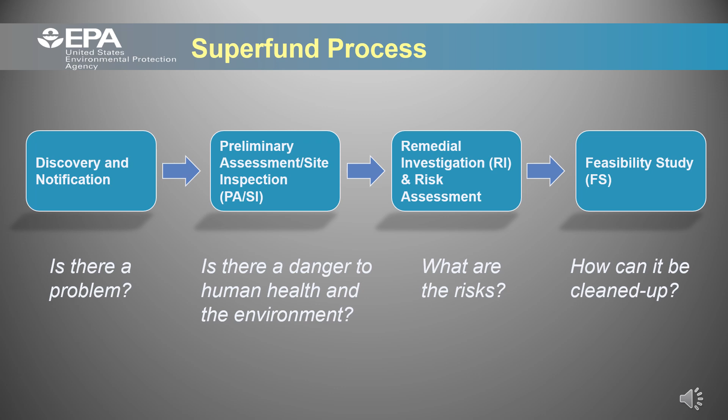Then potential cleanup alternatives are analyzed in the feasibility study, or FS. After the cleanup alternatives are developed, the option considered best for the site is proposed to the community for evaluation and comment in a proposed plan. Now, we've been at this stage before for this particular site. Back in 1993, a pump and treatment remedy was selected. Unfortunately, it was not effective and other cleanup alternatives were evaluated.

A responsiveness summary of the public comments and the responses to those comments will be created once the comment period ends. Public comments can change the course of action for the site, so it's important to submit any comments you may have. The cleanup method that is ultimately selected for the site, along with the reasons for its selection, are set forth in the record of decision that will be created after the public comments have been addressed.

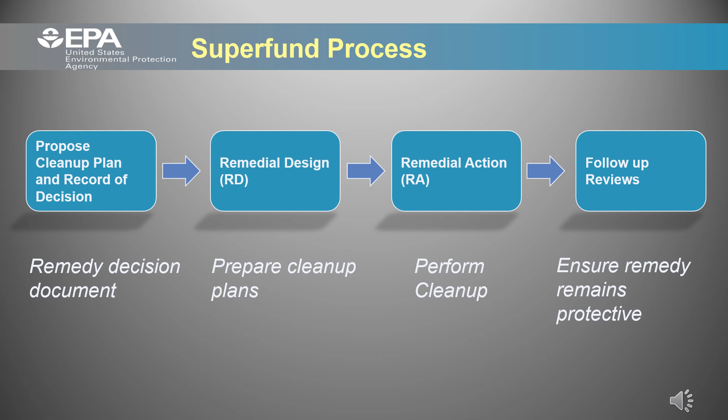From there, the remedy will be designed and implemented during the remedial design, or RD, and remedial action, or RA, respectively. Upon completion of the remedial action, long-term monitoring or 5-year reviews will continue until unlimited use and unrestricted exposure is achieved. Now, a little about the site background.

Operations began in the mid-1950s and the site was used by several companies for the storage and formulation of pesticides. Thomson Hayward Chemical Company, later renamed TH Agriculture and Nutrition, or THAN, purchased the property from Planters Chemical Company in 1967. Dry formulations, which combine technical materials in a proportion specified for a particular product, were mostly done in the 1960s and 70s. The liquid formulating area was used from approximately 1973 until approximately 1978. Very little, if any, pesticide formulating occurred at the THAN parcel after 1978.

THAN sold the western 7 acres, known as OU1, to VanCleave Builders in 2015. OU1 includes soil contamination on the western parcel, where THAN operated, as well as site-wide groundwater. The eastern 5 acres, or OU2, is owned by the Jones family properties. OU2 includes soil contamination on the eastern parcel, or Jones parcel.

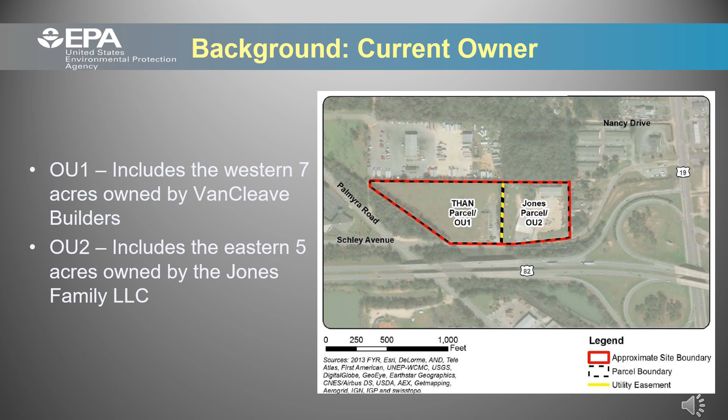The soil and subsurface contamination is believed to have resulted from cleaning activities. Typically, trucks were swept out on the eastern portion of the site and the yard adjacent to the large warehouse. The blending tank in the liquid formulation area was rinsed between batches of different products with xylene and was then discharged to a drainage ditch which ran east to west across the THAN parcel, behind the liquid formulation buildings, to the low-lying area in the southwestern portion of the property.

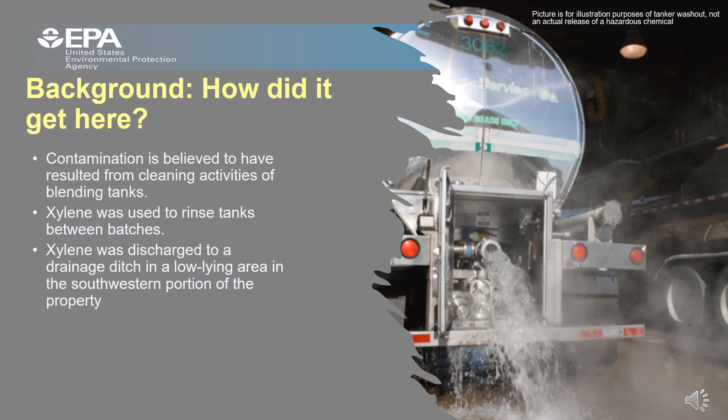Okay, let's continue with the site history. Business operations ceased at the site in 1982, and THAN conducted two removal actions to address contaminated surface soil. One in 1984 with Georgia Environmental Protection Division oversight, and the second in 1992 with EPA oversight. Activities included demolition of buildings and structures, installation of a perimeter fence, excavation of contaminated surface and shallow soil for off-site disposal, and establishment of a vegetative cover.

Based on contamination discovered during the first removal action and subsequent investigations, the EPA placed the site on the Superfund Program's National Priorities List, or NPL, in March 1989. In 1992, EPA performed oversight of excavation from the top foot of soil on approximately 6 of the 7 acres on the western parcel, with specific areas excavated to 7 feet below ground surface. In total, approximately 20,000 tons of soil was removed during the second removal action.

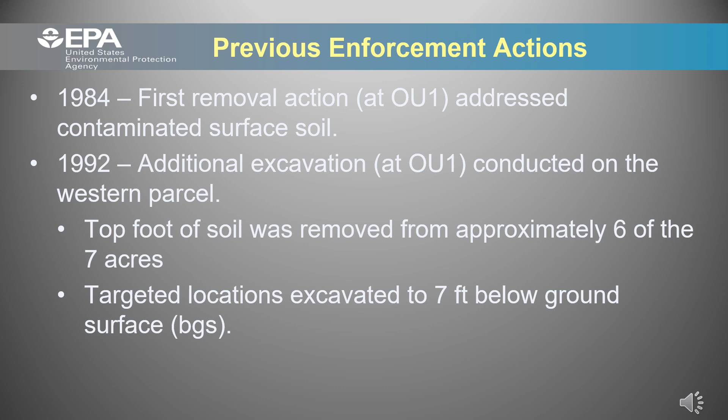The EPA issued the OU1 Record of Decision, or ROD, in May 1993, which included the THAN parcel and site-wide groundwater. The 1993 ROD selected pump and treat as the remedy, with quarterly monitoring and maintenance and institutional controls restricting land and groundwater use. The 1995 Explanation of Significant Differences, or ESD, expanded groundwater pumping, determined UV oxidation was not needed since the granulated activated carbon was sufficient, and added 3 dual-phase vacuum extraction wells to extract groundwater and soil gas. The 1995 ESD did not change the institutional controls or groundwater monitoring requirement.

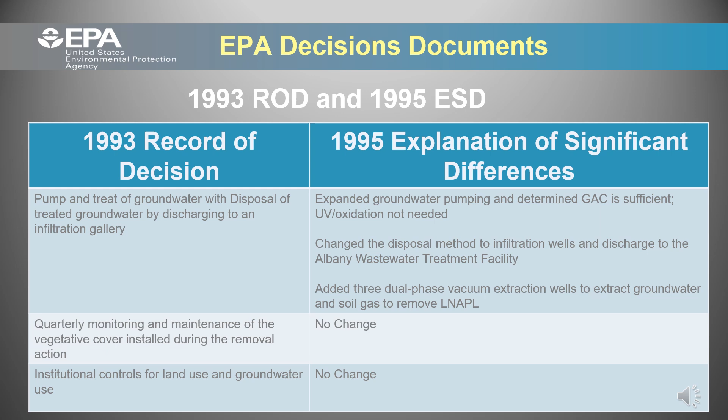A pump and treat dual-phase vacuum extraction system operated at the site between 1996 and 2002. No LNAPL was observed in the extraction system LNAPL separator during the first 2 years of operations. Therefore, EPA determined that LNAPL removal was considered ineffective, and the LNAPL separator was bypassed in November 1998. From 1996 to 2002, approximately 3.5 million gallons of water was removed, containing an estimated 480 pounds of LNAPL and 7 pounds of pesticides. In 2003, operation of the groundwater treatment system ceased due to the low contaminant of concern recovery rate. THAN continued to monitor groundwater contamination trends and plume migration to evaluate other options for the treatment of site groundwater.

In 2013, the EPA evaluated groundwater contaminant trends and plume migration and determined that the groundwater plumes were not migrating laterally. However, concentrations of some contaminants were increasing in deeper wells, likely as a result of vertical migration from the shallow aquifer zone.

The LNAPL plume, or xylene, is located in the central portion of the site. The LNAPL is considered a principal threat waste. It acts as a carrier for pesticides. Therefore, this liquid contains toxic compounds and is a source of groundwater contamination. The dashed blue line represents where xylene concentrations are detected above 10,000 micrograms per liter. Monitoring well MW-N2 regularly contains measurable LNAPL. In October 2022, it was measured at a thickness of approximately 2.5 feet.

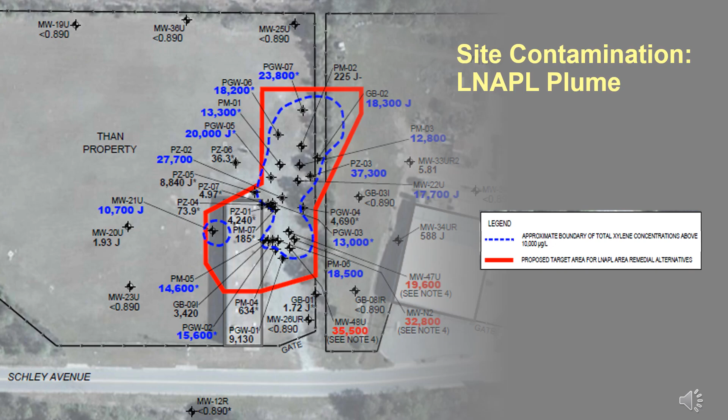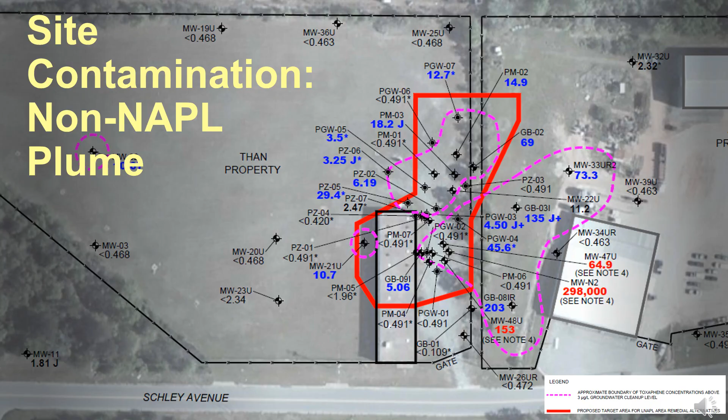This slide is going to touch on the chemicals of concern and cleanup levels, which are based on either Safe Drinking Water Act maximum contaminant levels, referred to as MCLs, or human health risk-based values. Let me try to provide some context on these values.

MCLs are laws that help ensure our drinking water is safe to consume. Each chemical-specific value is based on scientific research and health considerations. Human health risk-based numbers are important tools for assessing the potential risk associated with exposure to various substances. These numbers are based on scientific data and are designed to ensure that people are not exposed to harmful levels of toxic substances in their daily lives or work environments.

The units of measurement for the proposed cleanup goal are micrograms per liter. This measurement expresses the concentration of a substance in a liquid or solution. Specifically, it refers to the number of micrograms of a substance, in this case, a contaminant, which is present in 1 liter of liquid. This is a very small number.

Take, for instance, a dime, a raisin, or one plain M&M, and imagine holding it in your hand. Each one of these weighs about 1 gram. If you were to cut an M&M into 1 million pieces and dissolve one of those pieces into 1 liter of water, you would have 1 microgram per liter of M&Ms present in that water sample.

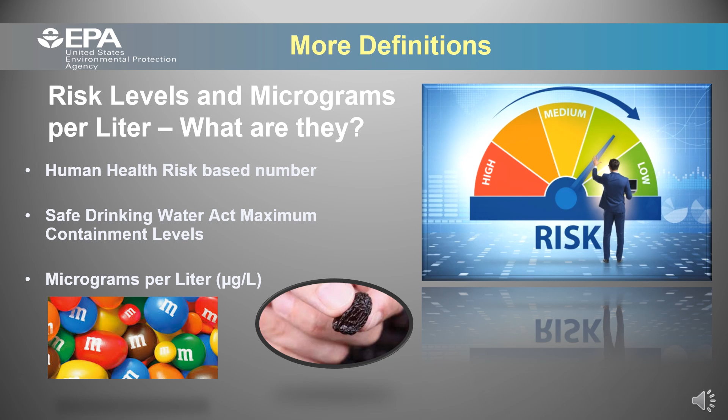Now that we have a basic understanding of how cleanup numbers are derived and the units used to measure them, let's continue. With the exception of xylene, the 1993 Record of Decision, or ROD, listed these chemicals of concern and associated cleanup targets in the middle column. This amended ROD will not change the cleanup level for EDB and toxaphene, since those values are still the current MCL for those contaminants. This amendment will add xylene as a chemical of concern with a preliminary remediation goal of 10,000 micrograms per liter, which is the MCL for that chemical.

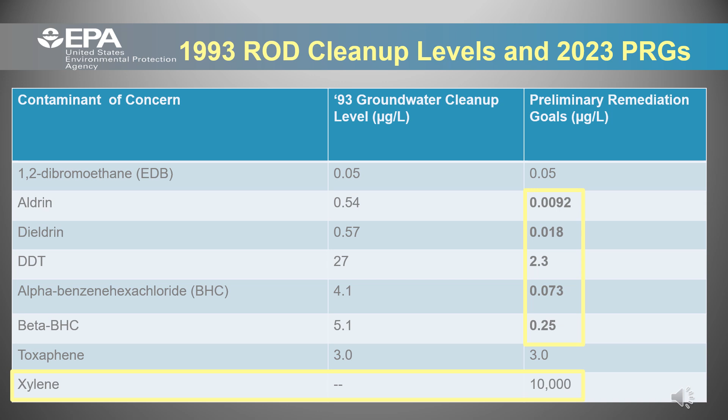It will also decrease the remaining pesticide chemicals of concern identified in the yellow box to an acceptable risk. Achieving these preliminary remediation goals would meet EPA's upper bound of the acceptable cumulative risk range and the non-cancer hazard index of 1.0 for both residential and worker exposures.

These next 2 slides will look at the alternatives evaluated for LNAPL and non-LNAPL groundwater. Because we have LNAPL, which acts as a carrier for pesticides, we are looking to address the LNAPL first, then the non-LNAPL groundwater plume or pesticides. LNAPL alternative 1 is the no action alternative, which is evaluated at all Superfund sites as a baseline for comparative analysis purposes. LNAPL alternative 2, in situ chemical reduction and enhanced anaerobic biodegradation, injects amendments to chemically degrade contaminants within the LNAPL area. Performance monitoring would be necessary to confirm long-term reactivity and effectiveness.

LNAPL alternative 3, air sparging, includes installation of air injection and vapor extraction wells throughout the LNAPL area. VOC emissions would be captured with devices such as granular activated carbon. The system would be operated for at least 2 years, during which groundwater performance monitoring would occur to maintain system optimization. LNAPL alternative 4, thermal treatment, includes installation of thermal conductive heating wells throughout the LNAPL area. Thermal conductive heating is used to heat the subsurface to volatilize the chemicals of concern. Soil vapor extraction wells would be installed to capture vapors generated during thermal treatment.

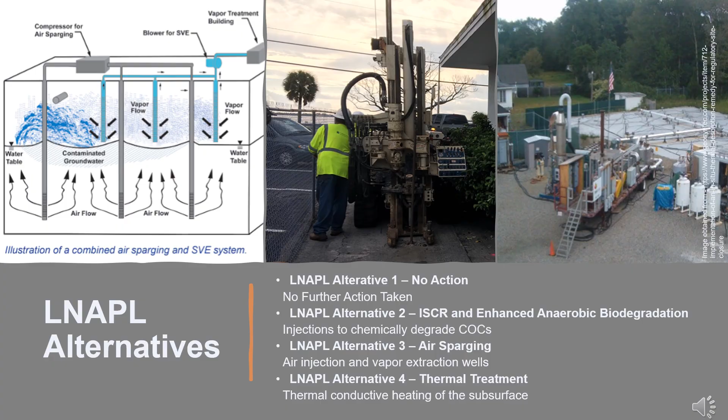Regarding the non-LNAPL groundwater alternatives, alternative 1 would include no further action. Non-LNAPL groundwater alternative 2, monitored natural attenuation, includes monitored natural attenuation, or MNA, of chemicals of concern in groundwater rather than active remediation. Chemicals of concern concentrations would be monitored to confirm a stable or shrinking plume and continued decreases towards groundwater cleanup levels. Non-LNAPL groundwater alternative 3, in situ chemical reduction and enhanced anaerobic biodegradation. As previously mentioned, it would include injection of amendments to chemically degrade chemicals of concern, and performance monitoring would be necessary to confirm long-term reactivity and effectiveness.

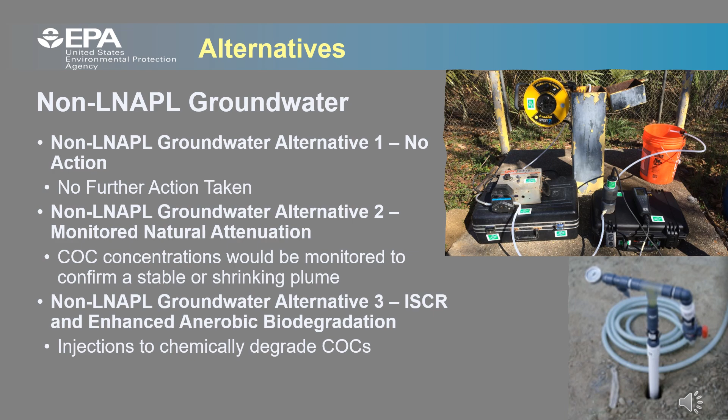The costs of the discussed groundwater remedial alternatives are shown here. The costs range from $0 for the no action alternative to $14 million for the thermal treatment. The alternative that is being proposed to address the contamination on site is air sparging with soil vapor extraction for the LNAPL and in situ chemical reduction and enhanced anaerobic biodegradation for the non-LNAPL groundwater or pesticide plume, which comes in with a combined total around $8.78 million.

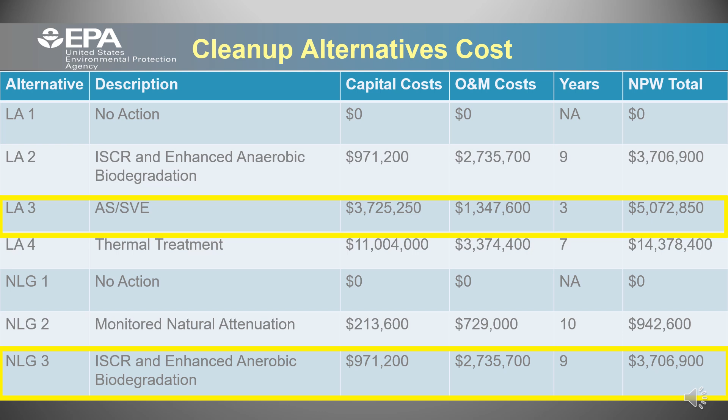Elimination of the principal threat waste, which is the LNAPL plume containing toxic compounds, is needed to help immobilize the non-LNAPL groundwater contaminants. After evaluating all alternatives against the criteria, the preferred remedy for Operable Unit 1 is a two-phased approach due to one remedy injecting air and the other requiring an anaerobic or no oxygen environment.

First, eliminate the LNAPL with a proven technology, air sparge with soil vapor extraction. This will remove the source or the principal threat waste and help further reduce the likelihood of pesticide vertical and lateral migration. The system would be operated for at least 2 years, during which groundwater performance monitoring and influent soil vapor extraction vapor sampling would be conducted to assess remediation progress and to support system adjustments and optimization.

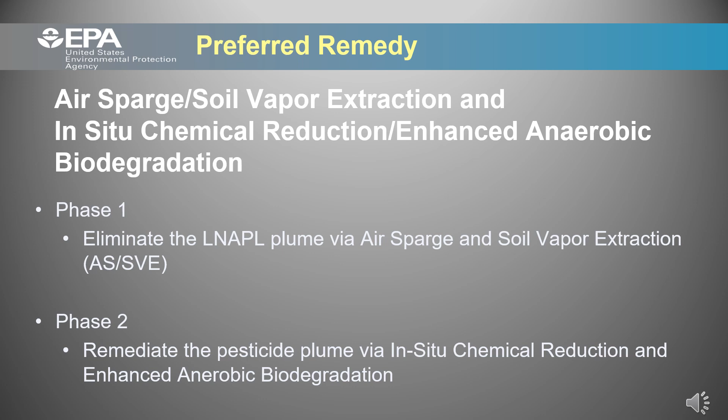Phase 2 will utilize in situ chemical reduction and enhanced anaerobic biodegradation on the pesticide plume to speed up the breakdown of these chemicals. Performance monitoring will be conducted to confirm long-term reactivity and effectiveness. It should be noted that while injections would accelerate groundwater contaminant of concern concentration reductions, achieving groundwater cleanup levels would likely require several years of post-injection groundwater monitoring.

Let's take a closer look at how these remedies will work. As I mentioned, air sparging with soil vapor extraction will be the first phase, which will primarily address the LNAPL plume. The combination of air sparging with soil vapor extraction helps to remove contaminants from both the soil and groundwater by promoting the transfer of these contaminants from the soil and water into the air, then capturing and treating the contaminated air. So how does it accomplish this?

Air sparging injects air into the contaminated groundwater or soil. The air rises through the water or soil, creating bubbles that strip contaminants from the water or soil and transfers it into the air. This process helps to release volatile organic compounds and other contaminants from the groundwater or soil into the air.

The air, now carrying the contaminants in the form of vapor, is then extracted from the soil or groundwater using a vacuum or blower system called soil vapor extraction. The air is pulled out of the ground or pumped out from wells, and it passes through treatment systems to remove or capture the contaminants from the air before it's released into the atmosphere.

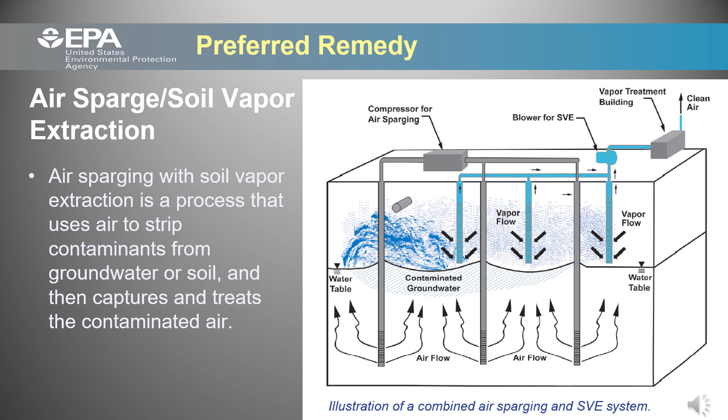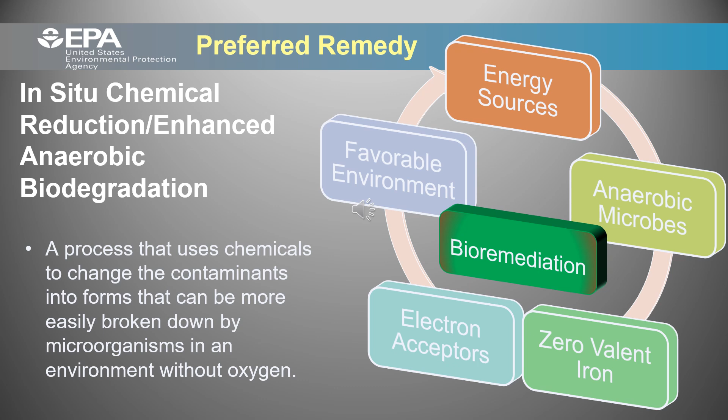After EPA has received comments and questions during the public comment period, EPA will summarize the comments and provide responses to all questions and comments in the responsiveness summary, which will be part of the amended record of decision, or AROD. The AROD will select the final remedial action and will provide the rationale for EPA's selection. The AROD will be available for review in the information repository and online once complete.